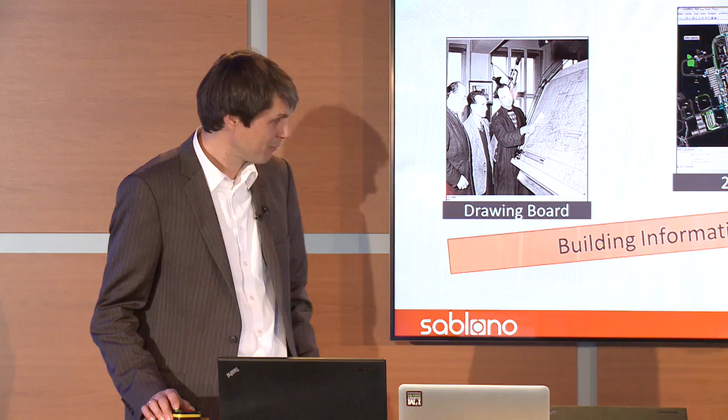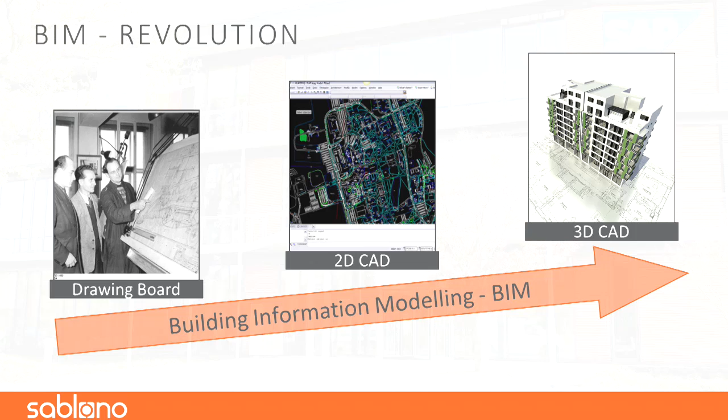So at the time, there's a revolution going on in construction industry. It's all about virtualization and digitalization in building industry. CAD formats don't only contain geometry information anymore. They also contain physical behavior and further data.

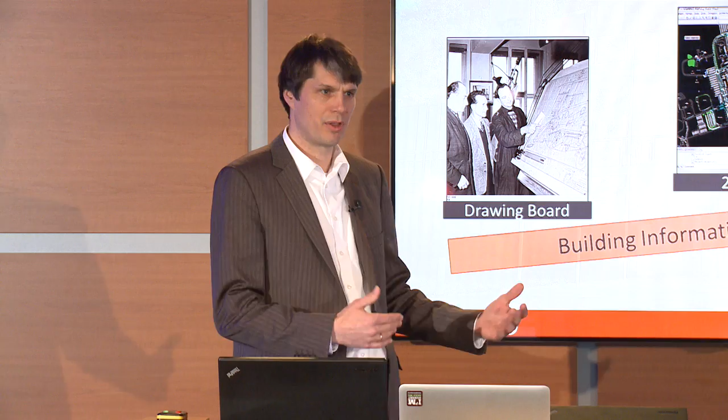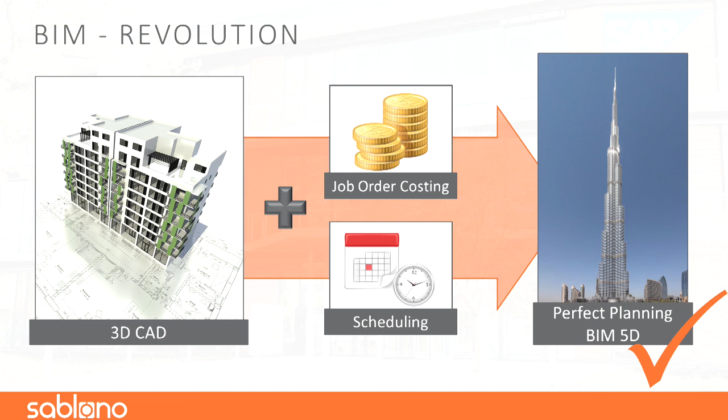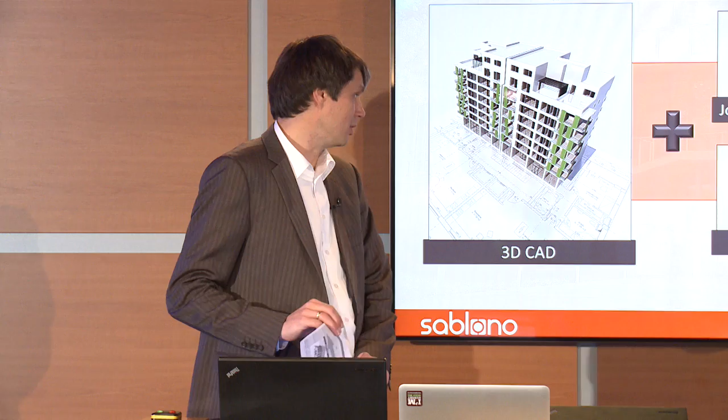If we consider a 3D BIM model and we add cost information and scheduling information, it is common understanding that these type of building information models are considered as BIM 5D. BIM 5D suggests that perfect planning is possible. Now, if we look to real-life projects, delays and cost overruns are the order of the day.

So what is so challenging in project management? We have many project participants with different backgrounds, different domains. Each of these participants has their own set of data, their own formats, their own workflows. Project management is very fragmented and disconnected.

SABLONO's solution is enabling distributed collaboration based on a process model at a very high level of detail. So participants contribute to a centralized data model, and they can also profit from contributed data which comes from other participants. The SABLONO platform represents a project information system which allows to provide real-time reports that are necessary for reliable decisions.

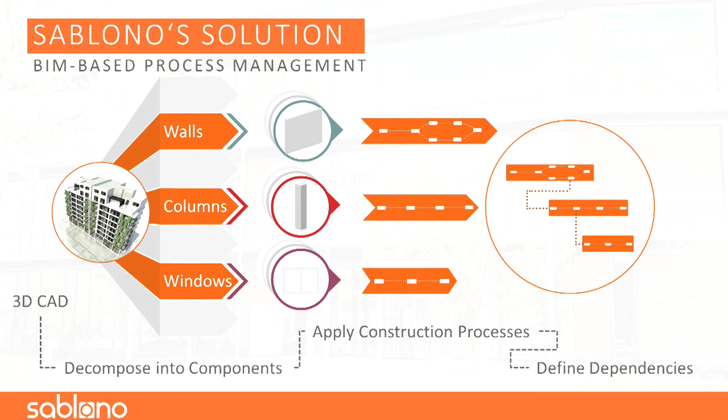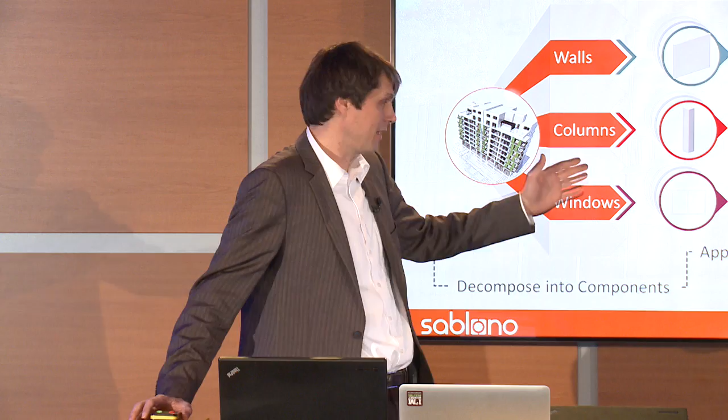Now let's look to the underlying process model. What is unique about our approach is that we link design information, which is typically geometry, components, behavior, with process information. So we link standardized templates with the components, and out comes a very highly detailed process model that we can analyze. The link between the design information and the process information is enabling 5D construction.

If we look to these process models, we take them, derive schedules for project management, and these schedules for a project like this innovation center would consist of 50,000 activities and about 100,000 dependencies between these activities. So that's the addressed level of detail that we work with in our approach.

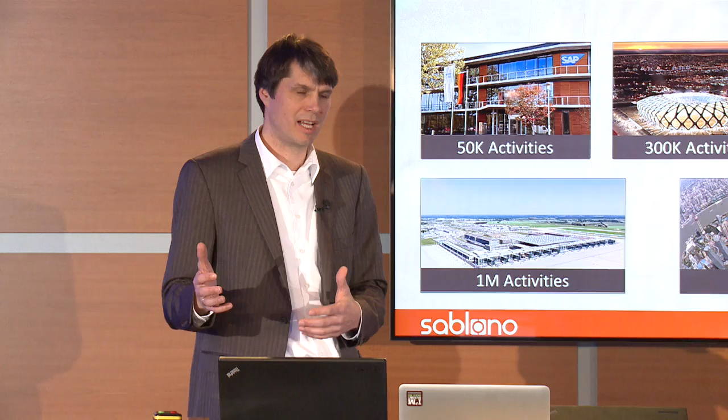If we look to bigger projects, very quickly the number of activities becomes very big, and we need high performance in the back end to solve all these calculations and data analysis to provide real-time scheduling.

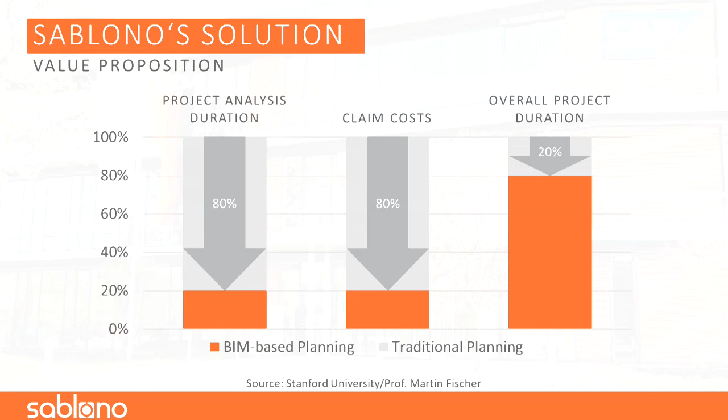So the value proposition of applying BIM technologies is especially to reduce project analysis durations. This is possible up to 80%. We reduce claim costs because decisions are based on more reliable input, and the overall duration can be reduced by 20%. This is the result of a study from Martin Fischer from Stanford University.

So why do we use HANA? Well, because construction projects are complex. And if we address topics like resource planning, we even need to consider not only one project, but many projects. The data that we deal with is highly connected.

So, for example, if we want to calculate the duration of an activity, it's not as simple as we take an effort times amount, out comes a duration, because to get the value for the effort, we need to analyze a big data set, and this real-time value that we get will be used to calculate each single duration of each single activity in our network. So scheduling and simulation based on real-time data is tremendously calculation intense and requires a lot of data analysis.